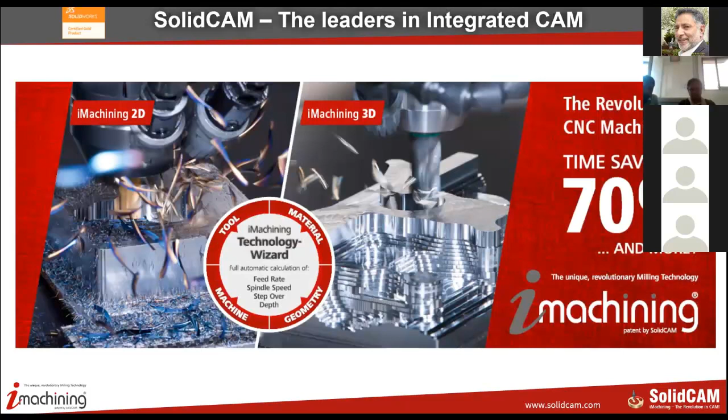Let me quickly get to the mission. We are here to provide every one of our customers a very powerful, complete, easy to use CAM solution with a revolutionary product called iMachining, which is changing the way machining is done worldwide. And this is completely available inside SolidWorks.

SolidWorks is our front end platform. We also have a very similar product, or probably it's the same product, but it works inside Inventor, and we call that Inventor CAM. Same functionality, it has the look and feel of Inventor, whereas once we start working inside SolidWorks, we have the look and feel of SolidWorks right through the entire manufacturing process.

Quick word about SolidCAM. It was founded in 1984, that's about 34 years back, in Israel. We are headquartered in Israel, where we have 2 offices, mainly development and support operations. The largest operation out of Israel is in Germany, where we have 6 offices and a staff strength of close to almost 90 people, which is a very big operation considering the size of Germany.

Also, we have our direct operations in the US and Canada. In Asia, we have operations in Japan, India, and China. Affiliated companies, which use the name of SolidCAM but are run privately, are in France, UK, Czech Republic, and Australia, New Zealand. We have more than 140 resellers worldwide and more than 40,000 licenses installed. That's a pretty good number considering we are in a niche area of CAM.

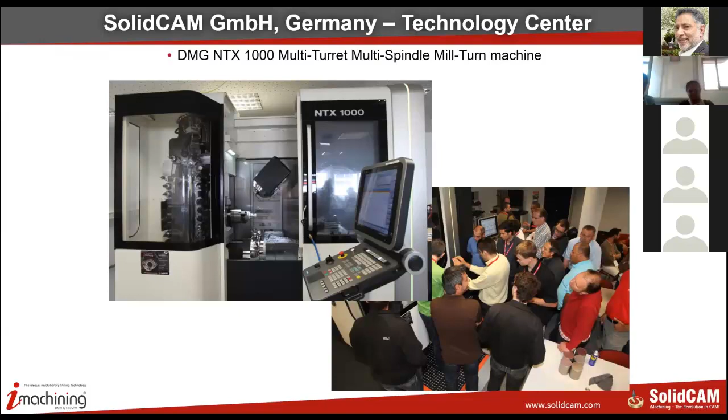Every office of SolidCAM is a very unique office. It doesn't just have computers, tables, and chairs, but it also hosts some of the most complex CNC machines ever seen. For example, our office in Germany has an NTX 1000 multi-turret multi-spindle machine, which costs close to about $2 million US. It's a very complex machine with 12 axes, and parts like these are manufactured on such machines in a single setup.

We use these machines to test our product, to cut parts, and to train customers. So a lot of things have been done using these machines.

In the same establishment in Germany, we have a Hermle C30U, a high-precision 5-axis milling machine, and also a Citizen 820, which is a Swiss-type machine, costing about 1 crore in Indian rupees. Whereas the NTX would easily touch about 2.5 crores, and the Hermle C30U would cost about 1.5 crores.

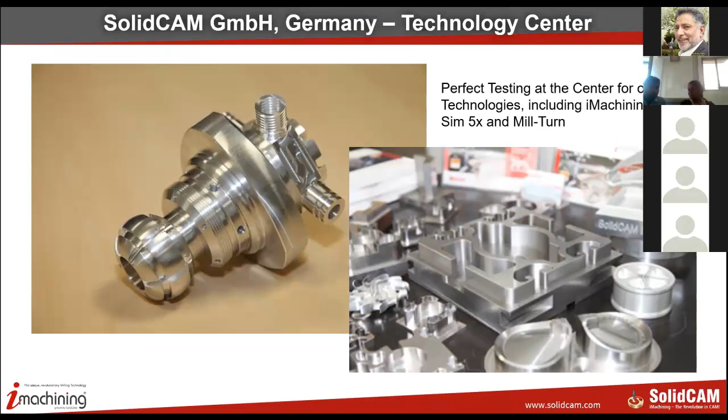In other offices worldwide, in the US, we have Hurco VM10 and VM10 UI machines, basically 3-axis and 5-axis machines at our offices in 8 different locations. We have more than 900 industrial customers and 20 staff in the US for sales and support.

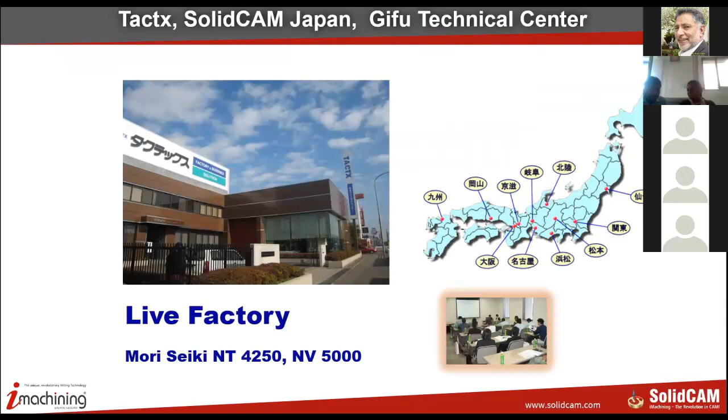In Japan, we have a tech center in a city called Gifu, where we have a Mori Seiki NT4250 and NV5000, which are highly complex mill-turn and 5-axis machines, again costing a few crores. We have made this investment into every technological center in almost every country so that customers can get the confidence of using the product straight away, because they know these products are tested on such complex machines.

Our operations in India began in 2008, and we have our offices in Pune, Bangalore, Chennai, New Delhi, Ludhiana, and Ambala. These are our nerve centers where we have support and sales. Our headquarters, of course, is in Pune, and I'm speaking to you from Pune.

We have more than 750 plus customers, the last count was about 780. We have 33 staff directly employed by SolidCAM India, a 100% subsidiary of SolidCAM Limited Israel, where we have 3 sales, 28 technical people, and 2 people into documentation. We grow at an average of 20% every year, and we are a de facto standard in multi-turret, multi-spindle machining.

That's a pretty complex area of machining. Our customer domains are across aerospace, power, oil and gas, general engineering, and die mold in that order. Today, our customers are like 40% in aerospace, about 15% in oil and gas, about 10 to 15% in power, about 5% in die mold, and the remaining in general engineering. And that's how we are.

We are today almost number 1 in aerospace when it comes to aerospace machining. Every alternate machine shop in Bangalore and Chennai has SOLIDCAM, so that's how popular we are in the south. In the north, we are very popular with the general engineering and medical industry, where we are very strong. It's almost equivalent that every alternate machine shop has heard about SOLIDCAM or will be having SOLIDCAM at their end.

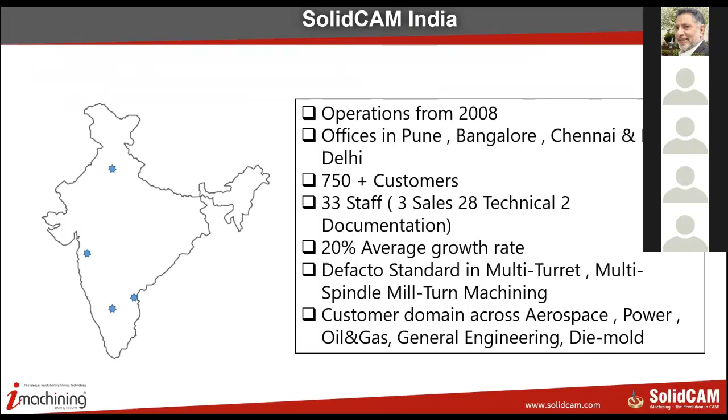CIMdata is an NC software and related services market assessment company. They come up with reports every year about different CAD/CAM companies worldwide, and they named SOLIDCAM as the fastest growing CAM vendor worldwide, 5 out of the last 8 years. If you take the reports of the last 8 years, SOLIDCAM has been consistently growing at almost about 40% every year.

The major benefits, first of all, working with SOLIDCAM inside SOLIDWORKS is the same look and feel, or single window integration, what we call it. The entire feel of working in SOLIDCAM is as if you're working with SOLIDWORKS functionalities. So that's how nicely it's integrated inside SOLIDWORKS.

Full associativity, which means the toolpath automatically updates when the SOLIDWORKS model changes. SOLIDCAM works in the assembly environment of SOLIDWORKS, which allows you to define fixtures, tooling, and vices, and carry all of these together with you for the machining process.

I'm more than 10 years as a gold partner to SOLIDWORKS, so it's a pretty long journey with SOLIDWORKS. We have this gold certification program every year, and SOLIDCAM gets through it. We get a badge saying that we are a certified gold partner, which basically means we have one of the tightest integrations of an external product inside SOLIDWORKS.

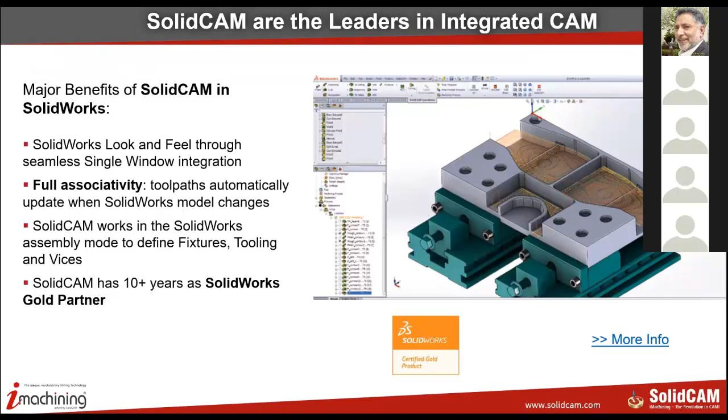The benefits of working inside SOLIDWORKS is that, first of all, you have got a single window integration. That means every functionality that we have with SOLIDWORKS is carried over into SOLIDCAM. So you have the same look and feel, easy to learn, easy to use. If you learn SOLIDWORKS, 60% of SOLIDCAM is already done. 40% is the process that you need to only learn.

Since SOLIDCAM works directly inside the SOLIDWORKS parts and assemblies, additional information like dimensions and tolerances are also available. There's absolutely no data translation, no conversion errors, and no missing data. That's how it happens.

Because we are working with SolidWorks, we support more than 18 formats that can be directly imported inside SolidWorks, like Direct Pro Engineer, Direct NX, Direct Inventor, Direct Solid Edge. If you're working with the professional and premium versions of SolidWorks, you could directly import CATIA. If you're having a native SolidWorks standard format, you can also import IGS, STEP, ACIS, Parasolid, and so on. So about 18 formats plus 4 or 5 direct, about 20 to 25 formats can be directly imported inside SolidWorks.

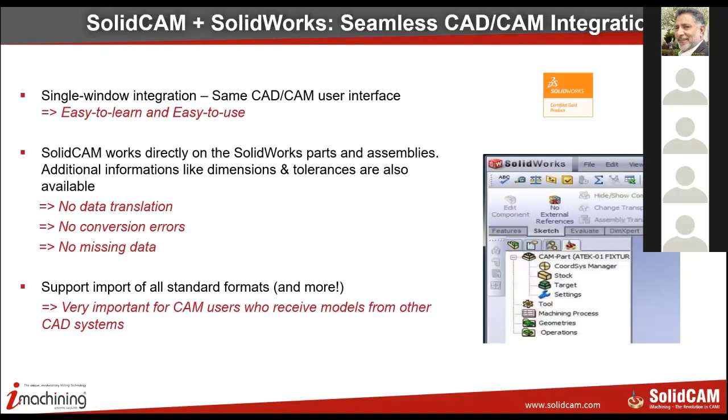This is very good for people who do job shops because they get data from different parts of their customers. It comes in different formats.

When I said complete integrated manufacturing solution, this is what I meant. We have got machining solutions from 2.5D milling, high-speed surfacing, 3D HSM and HSR.

This is for die mold and complex aerospace parts. Indexial machining for multi-setup machining. Simultaneous 5-axis machining with application-based support for impellers, for port machining, for swarfing, for screw machining, and so on.

They are standard functionalities. We've got turning and mill turn. We support up to 16 axis today, completely. Wire EDM and also solid probe.

What I did not explain to you was the first 2 modules, which are basically the game changers for SolidCAM: the iMachining 2D and iMachining 3D. So we're going to see a bit more about both these products.

So we have got what we call as a revolutionary iMachining functionality, which provides a time savings of almost 70% and more on machining. So if your customer is cutting metal, cutting a lot of material, scooping out a lot of material, and let's assume he takes an hour to cut a part, the same thing can be done inside SolidCAM in under 15 minutes using iMachining.

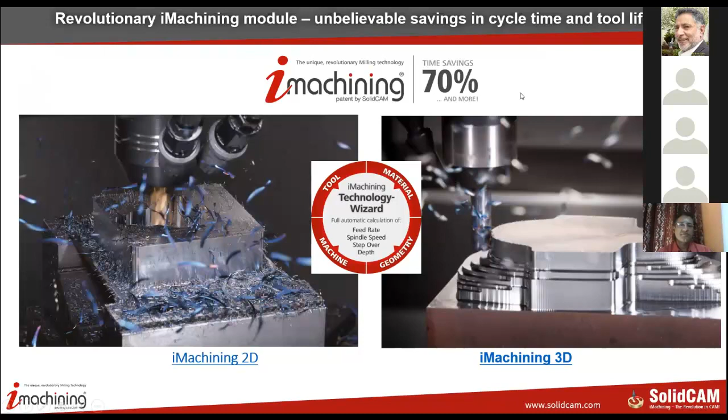iMachining 2D basically is a revolution in CNC machining. Increased productivity due to shorter cycles, dramatically increased tool life, especially if you're using smaller tools. We machine parts up to 90 HRC using iMachining - 90 HRC being your cutting tool material, basically tungsten carbide. iMachining is also available in 4-axis and mill turn.

Very high programming productivity - about 4 steps are needed only to define the entire process, and that's it. You get the program straight away from iMachining in just 4 steps. Shortest learning curve - just 1 day's training is enough for people who have absolutely no experience in machining to jump up to iMachining and generate programs like a professional.

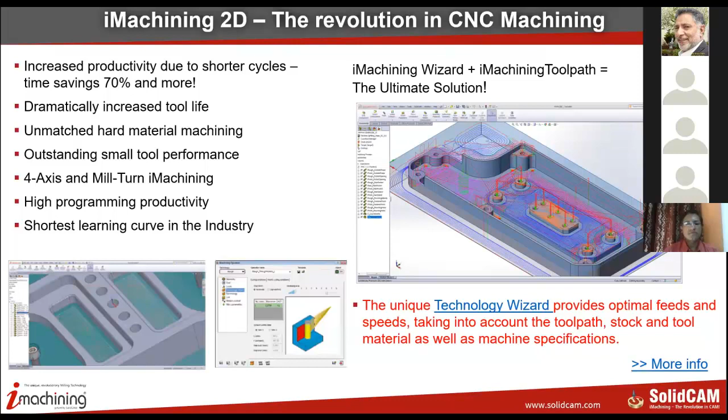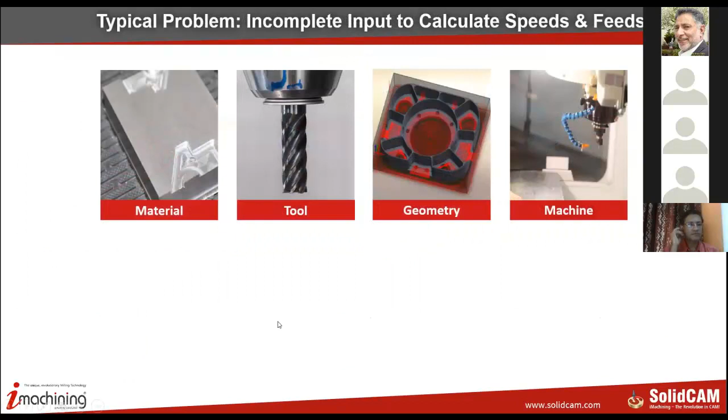I will now move forward, jumping these slides. What iMachining basically does is that it needs to know the material and the machine. So when I define a material, I need to tell iMachining that I have a material XYZ which has got an ultimate tensile strength of so many Newton per mm square. For example, if I take aluminum grade 6061, the aerospace grade, then the ultimate tensile strength of this material is about 460 Newton per mm square. So this is what I need to tell iMachining, that I have a material with a UTS value of 460 Newton per mm square.

I also have to define a machine. Let's say I have a machine of BFW. So I need to define what is the maximum RPM available on the spindle, what is the maximum cutting feed rate this machine can travel, what is the spindle construction - is it a direct spindle, a belt-driven spindle, or a gear-driven spindle, and what is the power available on the spindle. Once I define these 4 parameters and the material, it creates a database of this machine and the material.

Then it will ask me what is the geometry that you would like to cut. So I just define that I want to cut a pocket, a rectangular pocket. Then it'll ask me how much depth do you want to go, so I define the depth. Once I define this and pick the tool, iMachining then calculates everything on its own.

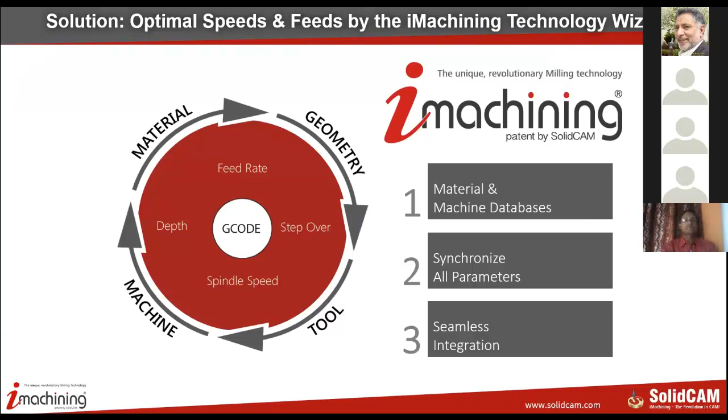This is a very complex calculation, and none of our competitors are near to where we are, even by a few hundred miles. It comes up with something unimaginable by even the best of cutting tool standards. And the best part is that the program runs on the machine on the very first attempt - you don't need to do any kind of dry cutting or nothing. It's unbelievable - people don't believe it the first time. They have to keep running it 1, 2, 3, 4 times to let that feeling sink in, that the machine, material and tool could behave in a different way than what we imagined.

We've got a lot of customers based on different domains. For example, in the oil and gas valve customers, we've got GE Dresser Valves Coimbatore, Flowserve India in Bangalore, Botil Oil Tools in Manesar, Sara Sae India Dehradun, Windlass Dehradun, Praveen Industries New Delhi, Precihole Thane, Crane Process Systems Satara.

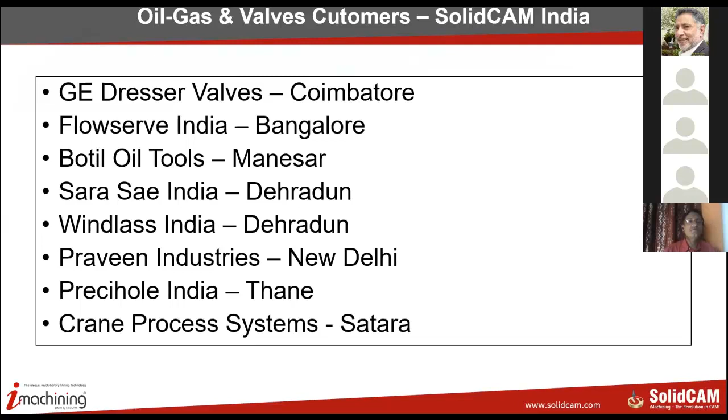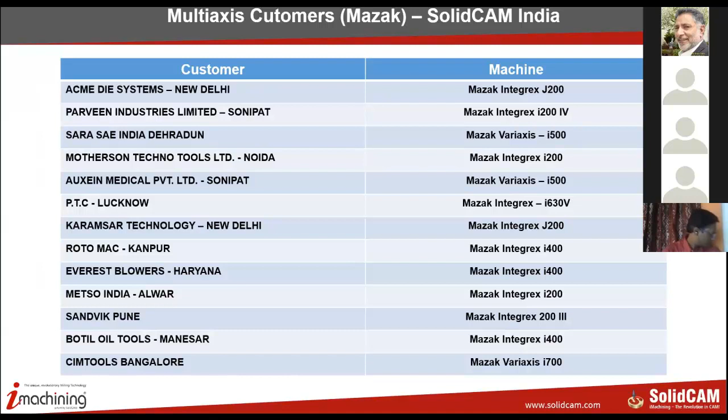With different machine tool vendors also, we have got customers - I've just noted down a few of them, can't put all 750 out here. We have customers with complex machines from Mazak, like the I400, I300, I200, these are basically Integrex machines - 8-axis, 9-axis mill-turn machines. We also have customers using the Deckel Maho or Deckel Morisaki machines, like Sandvik, KTS Spindle Tooling Pune, CIMTOOLS Bangalore, and Mac Aero Bangalore. So there are quite a lot of these customers using different complex machines and SolidCAM.

Some of the successes I would like to present here. This was one of the first successes that we had with iMachining, where we were cutting titanium - one of the toughest materials you can cut, mostly used in aerospace and also in the medical industry. Their existing cycle time using CATIA was 14 minutes, whereas with iMachining on the very first attempt, it was 3.5 minutes.

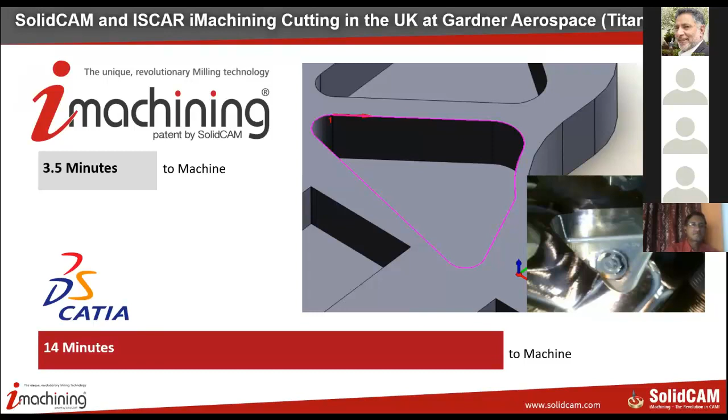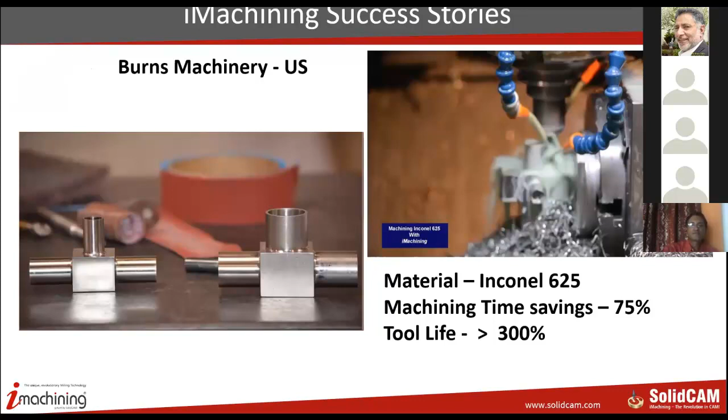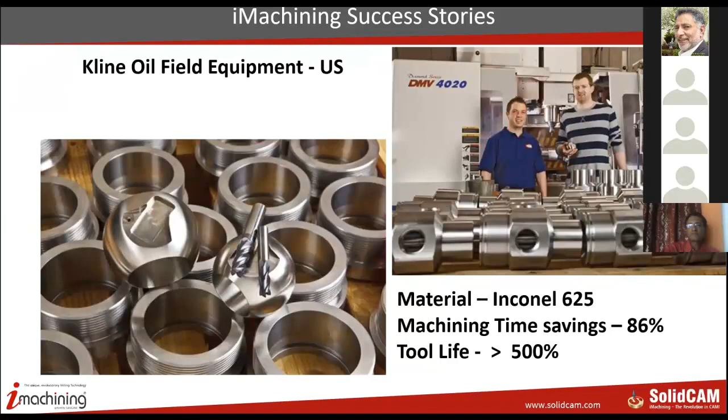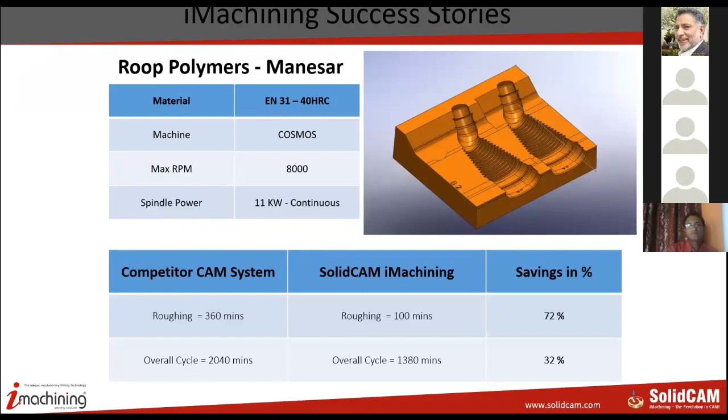Burns Machinery in the US - material was Inconel, again a very tough material to cut. Machining time saving was about 75%, tool life up by 300%. Again, an oil and gas company, material was Inconel, time savings about 86%. Roop Polymers in Manesar, this was our very first success in India with iMachining - EN31 40 HRC, and their existing cycle time of 360 minutes was brought down to 100 minutes by iMachining. Total cycle time down from 2040 minutes to 1380 minutes by SolidCAM.

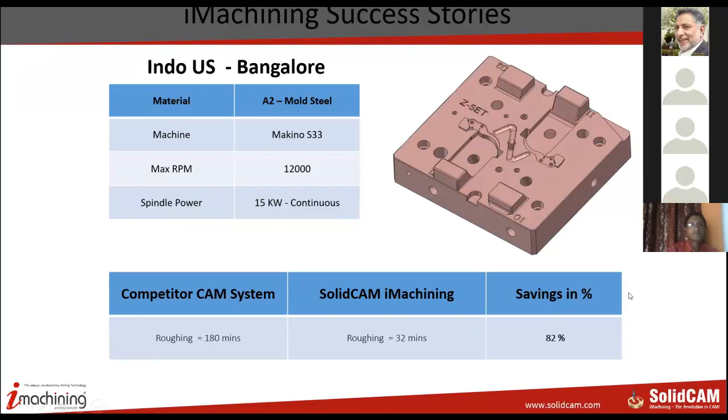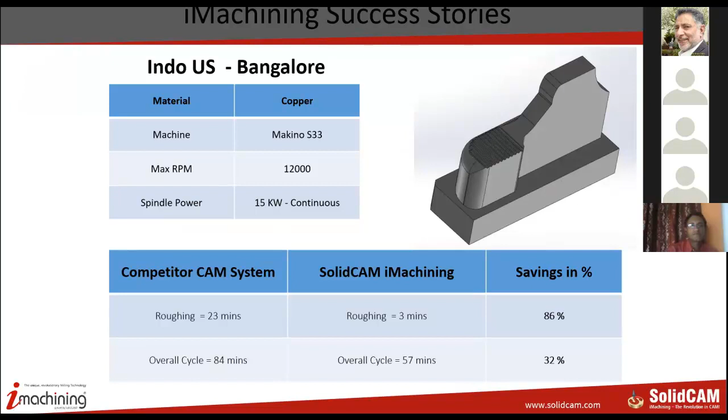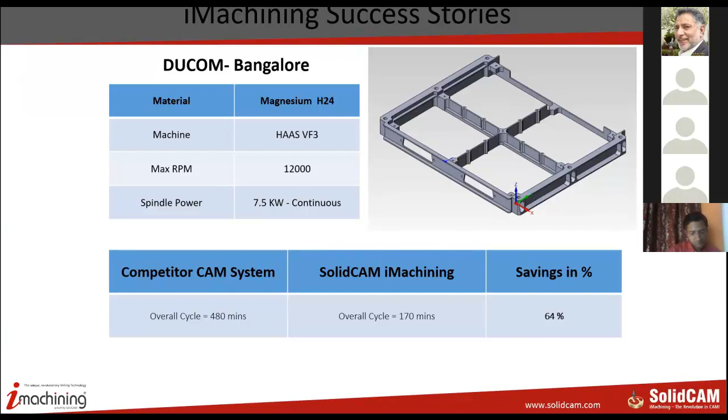DUCOM Bangalore, magnesium H24, one of the highly combustible materials. If you go wrong with your parameters, it can catch fire. 480 minutes down to 170 minutes. Ravilla Precision, they make turrets for LMW. On a TAL VM500, their existing cycle time was brought down from 240 minutes to 47 minutes.

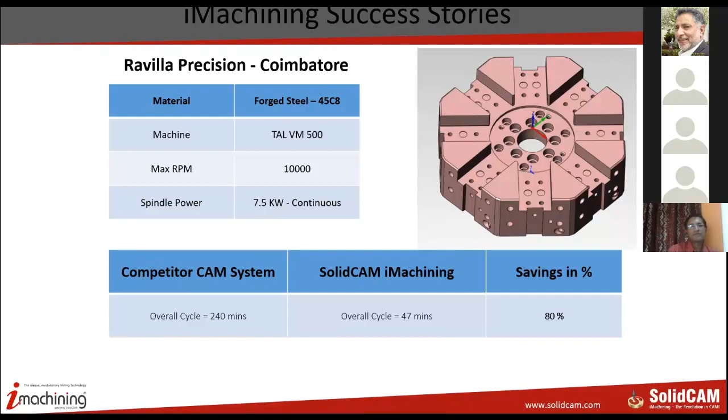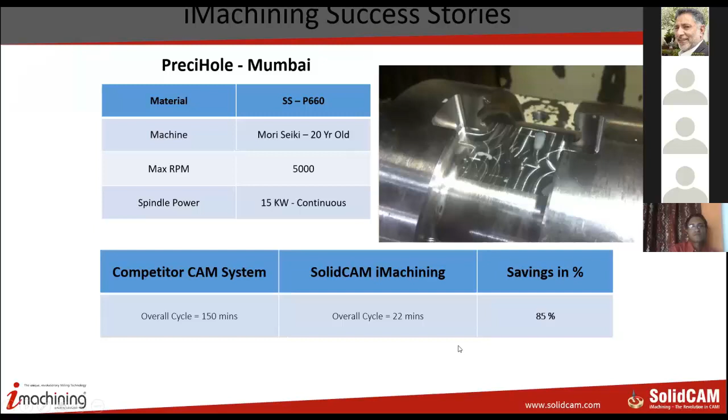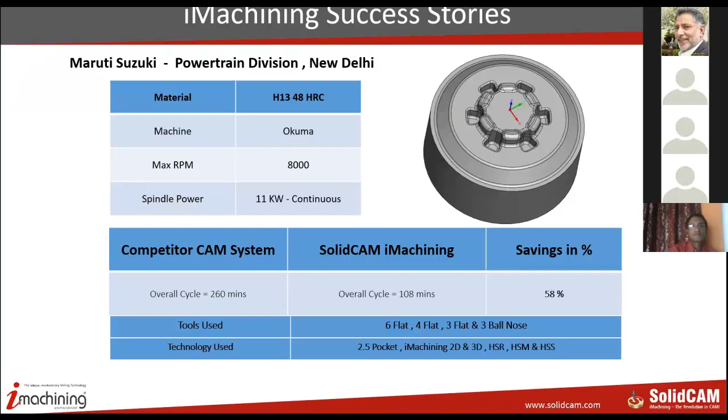PreciHole, this was done on a very old machine, a 20-year-old Mori Seiki retrofitted, on a stainless steel P660. Their existing cycle time of 150 minutes down to 22 minutes. Maruti Suzuki Powertrain Division on an H13 48 HRC material. Overall cycle time from 260 minutes down to 108 minutes, 58% savings in cycle time.

And the best part, material tungsten carbide. Our competitor cut the part in 42 hours. iMachining, very first attempt was 54 minutes. So you can see the amount of savings iMachining gets in when it is encountered with a challenging situation. Tough material, small tool, not so rigid work holding conditions, iMachining comes up the winner.

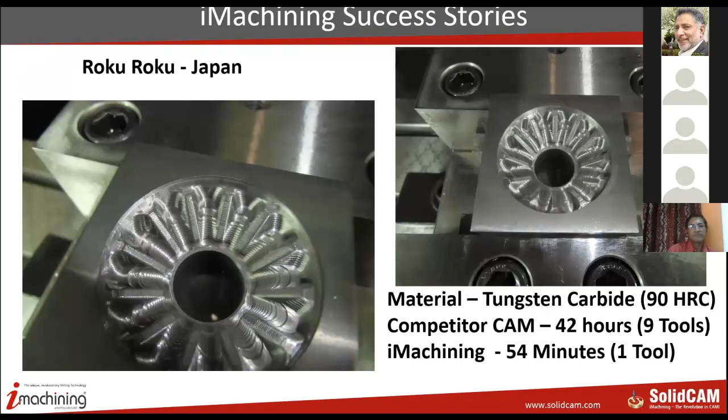Other than iMachining, we also have 2.5D milling, which is powerful and easy to use. You have full control over the entire toolpath, including feature recognition. We've got automatic drill and pocket recognition and machining, supports special thread milling operation. We have got direct integration with a world famous company for thread milling tools called Vardex, and also another company called Carmex. The G code generated includes full compensation, subroutines, M codes, and we can also create parametric post processors.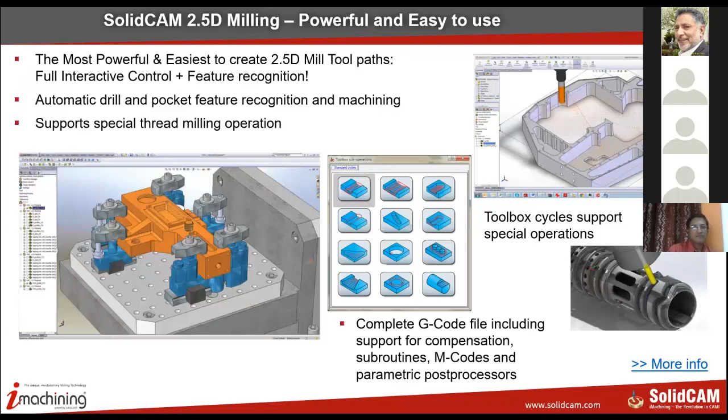SolidCam HSS, it's for high-speed surface machining, and it's a very good module to support 2.5D machining for machining localized surfaces. We've got advanced gouge control for holder, arbor, and tools, supports standard and shaped tools, and machines undercuts very easily.

SolidCam HSR and HSM basically is a module that is meant for die and mold applications, where you can cut extremely complex dies and molds very easily using all the functionalities given in HSR and HSM, where we have about 15 different types of finishing strategies, about 5 different types of roughing and rest roughing strategies, unique machining and linking strategies for generating high-speed toolpaths, no sharp corners, no sharp motions.

Indexial machining is for machining parts where you would like to cut it from different sides, or you would like to mount what you see here on your right-hand side, what we call in machining language a tombstone, where patterns of parts are mounted and you can machine the parts from different directions like an array. One part could be done 16 times, so you get 16 times the productivity; once you mount 16 parts, you get the finished 16 parts altogether. No need to mount and remount again.

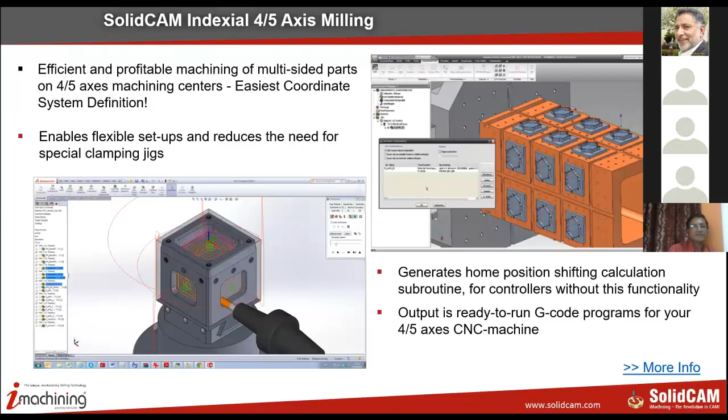iMachining 3D is an upscale of iMachining 2D, which we just saw. This is meant for, again, a die mold application where roughing is done using an end mill, and the technology of iMachining is applied to iMachining 3D.

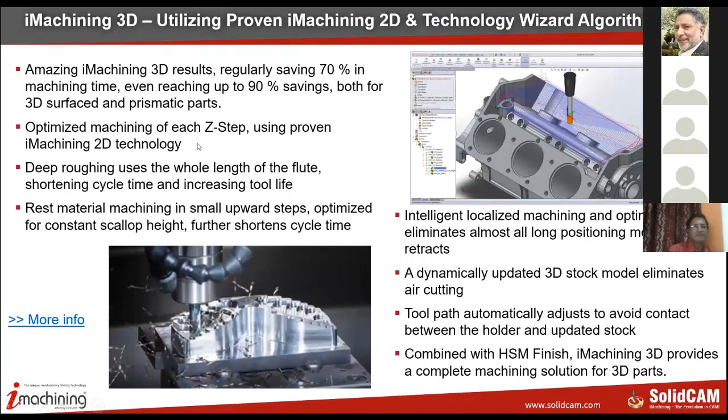Simultaneous 5-axis, it's very powerful, and we have got toolpath strategies to machine any kind of part in the world. There's nothing that cannot be done with SolidCam 5-axis. We also have specific application solutions for swarf, multi-blade, port, 5-axis deburring, multi-axis drilling, and conversion of 3-axis to 5-axis toolpaths. You can simulate the whole machine tool, showing the motion of all the rotational and linear axes.

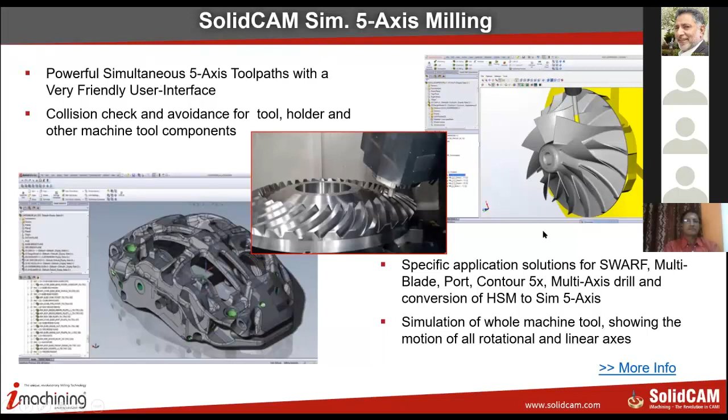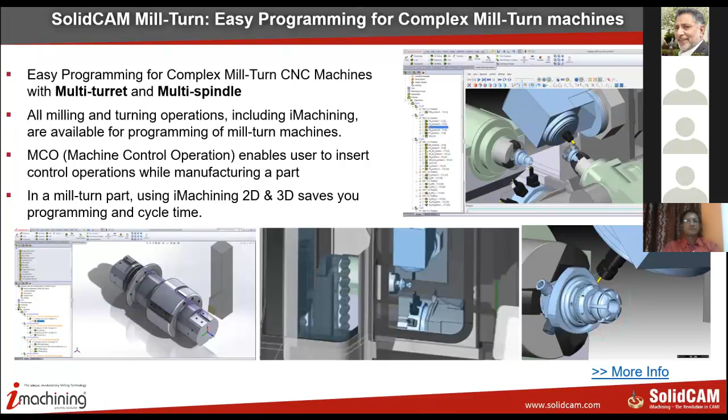You have mill turn, which is very complex, and it's been done very easily inside SolidCAM, where you can handle multi-turret, multi-spindle milling and mill turn machines. You can use iMachining inside mill turn. You can do machine control operations, and you can visualize the entire machining as if it is happening on the machine inside the software. So you could simulate the entire machine itself.

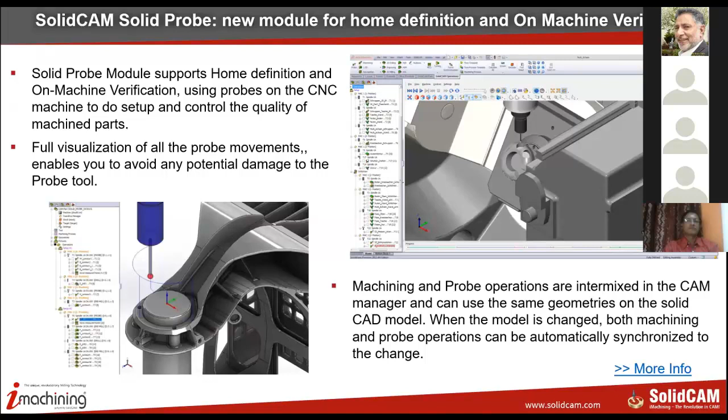And then you have a probe. We have SolidCam probe, which is used for defining the home positions and also for checking parts on the machine itself before they are unloaded. Because sometimes you could miss off a feature, and then reloading the part back onto the machine, centering it and getting the home position becomes very difficult. Instead of that, you spend about 2 or 3 minutes, check the part on a few of these features, make yourself sure that you have machined everything, and then unload the part. A very useful module inside SolidCAM.

So if you look at some of our international customers, we have got customers in different domains of automotive, aerospace and shipbuilding, mold and die, medical, consumer, electronics, mechanical manufacturing, military, optics, and education.

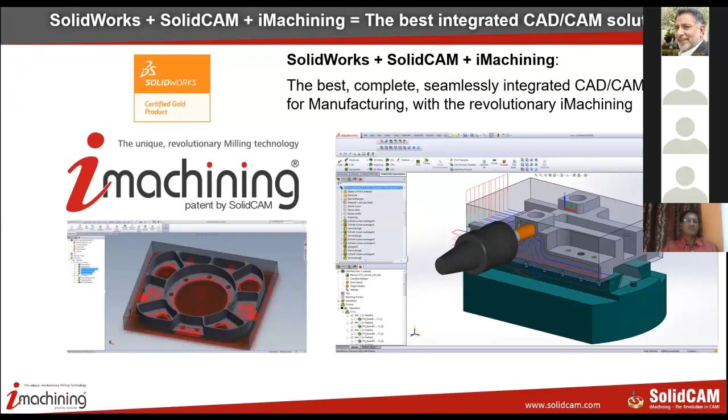So let's just look at how the software looks. For example, I'm now in my software. I'm inside SolidCAM, and you can see that I'm using all the functionalities of SolidWorks. Wherever I am, it doesn't matter what I'm doing, I'm always inside SolidWorks. For example, if I would like to edit this part, I can right-click on this, click on Edit Part, and you'll see that all my SolidWorks CAD functionalities are available to me without even having to close the window, go out, open something else, do the work, and come back.

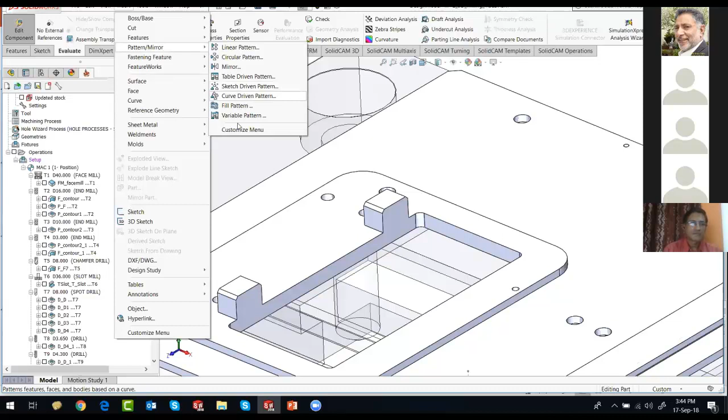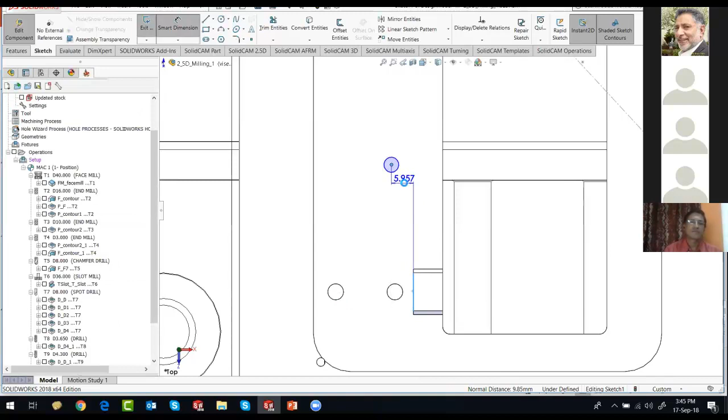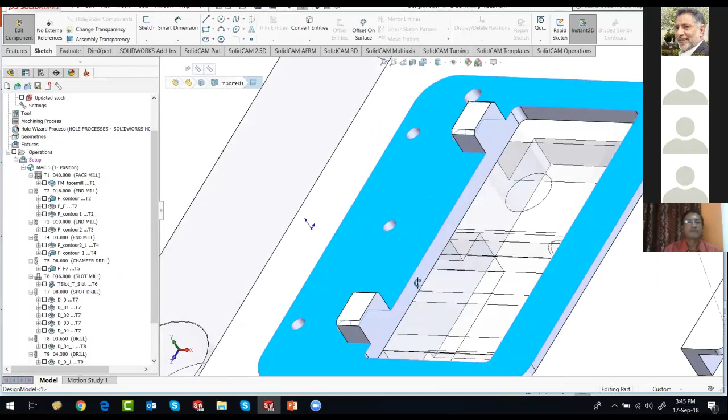For example, I would like to insert another hole here. So I'll go to the sketch, top view, make another feature here, and this is 2R. And if I want to provide a dimension with reference to, let's say, one of these edges, I can do that. This is 10 millimeters. And from here to this edge, this is about 30. It's done, and I'll extrude that one through all, and I'm done. I have the hole ready. I can come out of the SolidWorks part, and I'm back into my machining module.

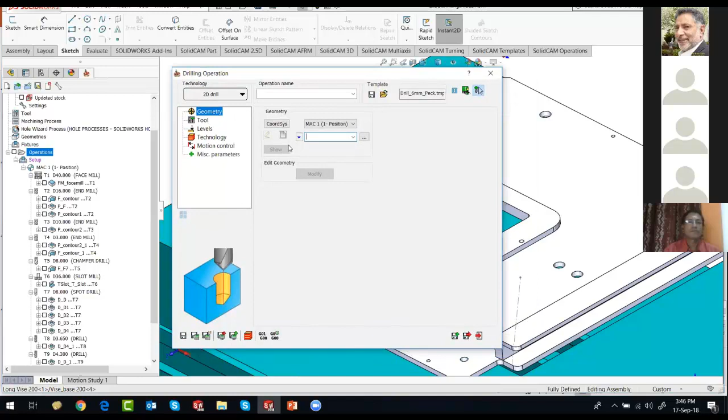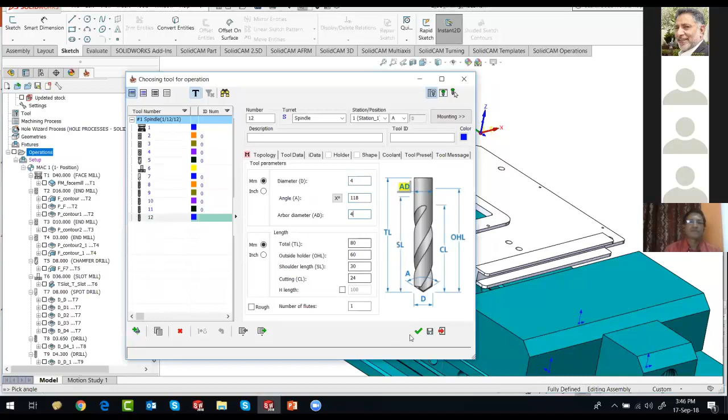For example, now I would like to do some drilling operations. So I can right-click on the operations here and apply drilling, the 2D drilling, and I can pick all the faces. I just pick the face, okay. I pick this face, and you can see that I've picked almost all of the holes that are available to me. And I pick the tool that I would like to use for drilling. So it's a 6 diameter. I would like to go with a 4 diameter first. Provide a holder. Since I'm using an HSK, I would like to use a shrink fit holder of

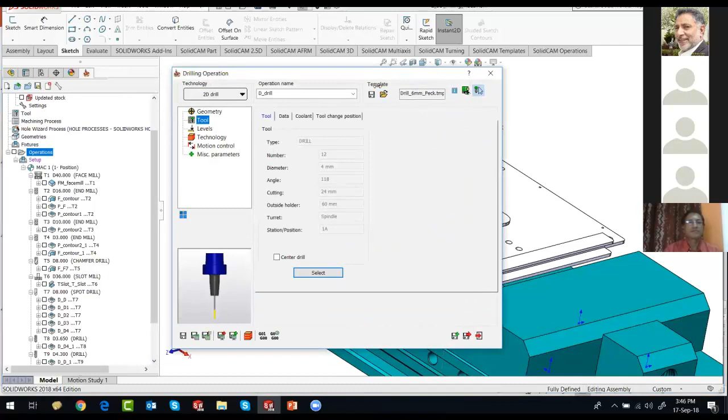6. So if I open the tool, now any changes that I make to the tool are automatically reflected in my image here, so I can get a visual feedback of what is happening. I'll accept it, pick the levels. Now I'm saying that the levels are automatic and the drill depth is about 10 millimeters. The cycle that I'm going to use, because I'm using a Heidenhain post processor, I'll use the pecking cycle, and my release distance is 1. Step down every time is 5 millimeters, and that's it.

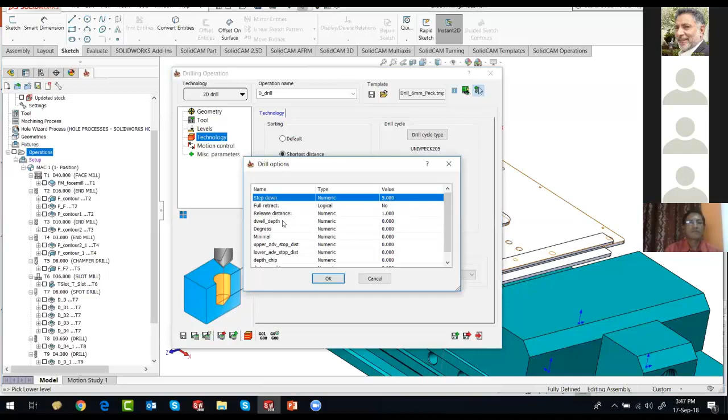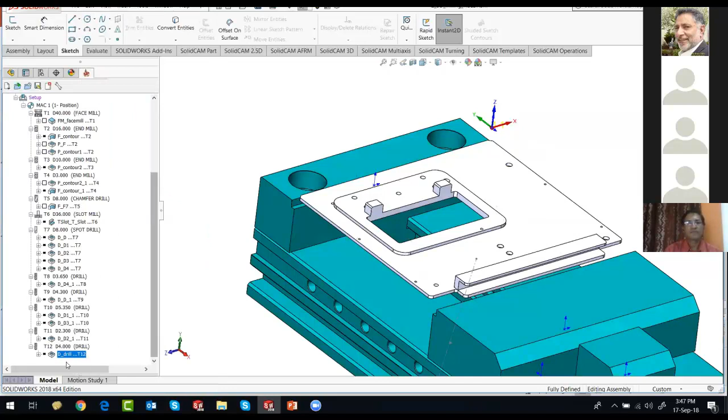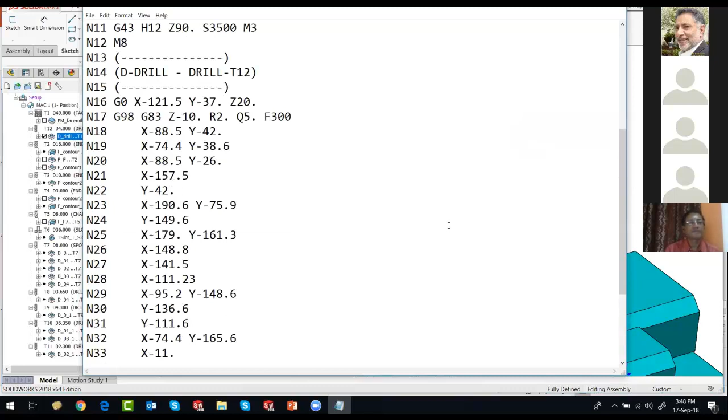Let's calculate. Okay, you can see that my drilling programs are done. I can change this to a more familiar control of FANUC. Okay. So I'll go to the last operation and calculate this. Put it up. Let's calculate this. And if I generate the G code, this is how my G code will look. So this is basically a simple FANUC example that I took up, generated the part program, and here is the output coming out from the part program. Okay.

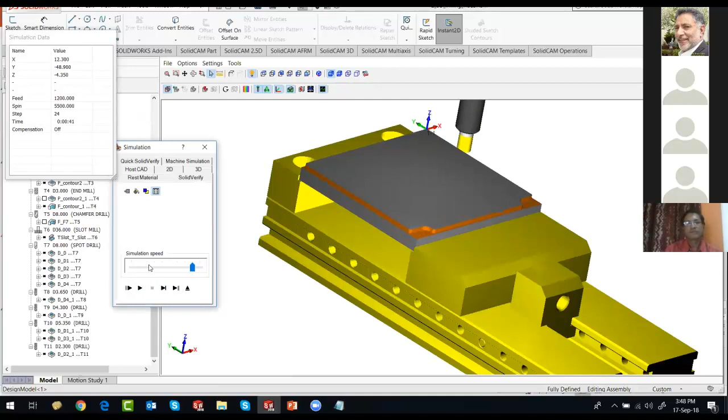So we have got drilling, we have got facing operation, and we have got contouring. So if I calculate this, I can do the external contouring. So if I run the simulation, if I go to Solid Verify, you can see that since I've used the assembly environment, I can now mount my fixtures onto the stock and use them to determine if there is any collision between the tool and the fixture. And this is how my machining will happen. Okay. So simulation is also directly available.

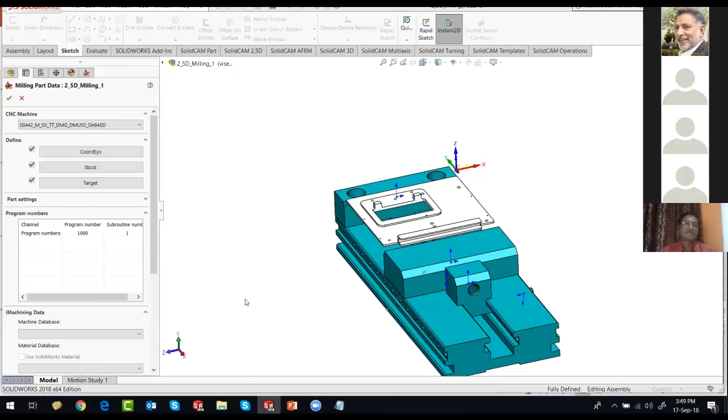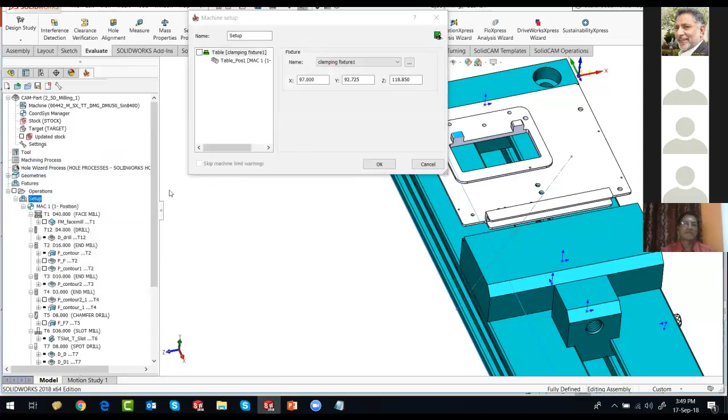Now, what I can do is I can change again to a different machine so that you can also see the machine simulation, what we have defined inside SolidCAM. So I'm going to use a DMU 50 monoBLOCK, and I just need to put some values here, from here to the bottom. That's about 120 millimeters. So let's add in the setup. Okay, it's already done. Say okay. I will calculate all the operations. Yes, please. So that's how quickly the operations are calculated.

And if I go into the simulation and to the machine simulation, you'll see that we load the entire machine from the CAD, and we are now ready for our simulation. So we have got a DMU 5-axis ready for our simulation, and we can start the simulation. You can see the material removal right inside SolidWorks. We did not close any of the trees or any of the windows, and now we are doing the external cutting. We finished drilling.

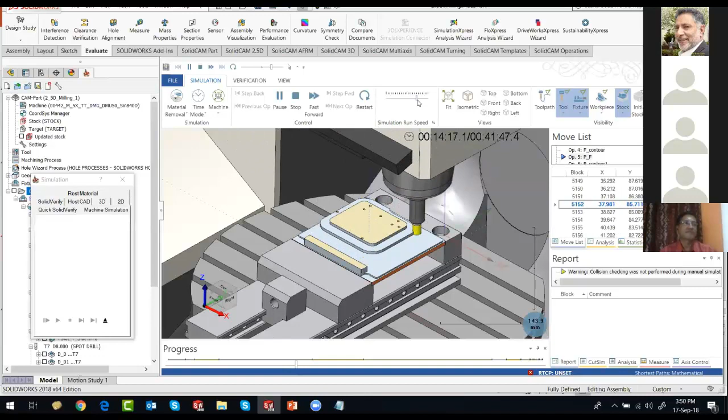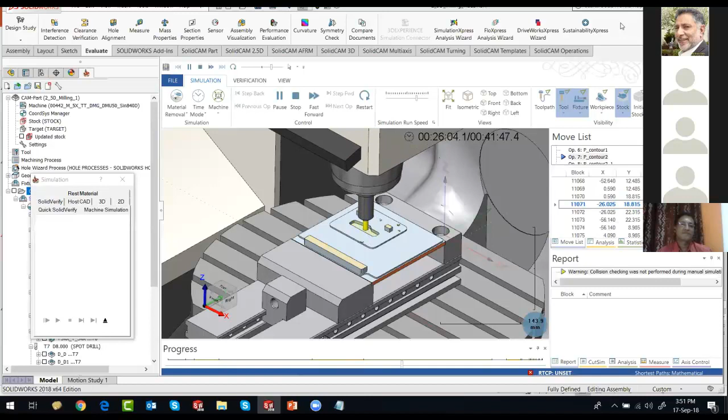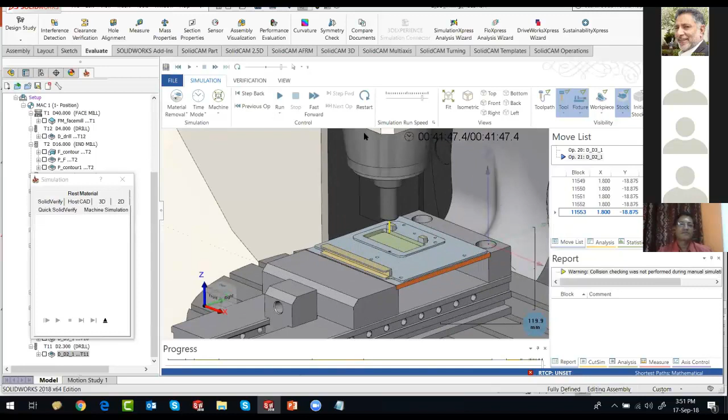Okay, now the upper part is being done. You can zoom, you can increase the speed at any given point of time. Okay, that's how the part is completed now. It's now waiting for me to exit. Okay, so we've got a complete machine simulation that's built in inside SolidCAM. So you can simulate whether it's milling, turning, or any kind of an operation.

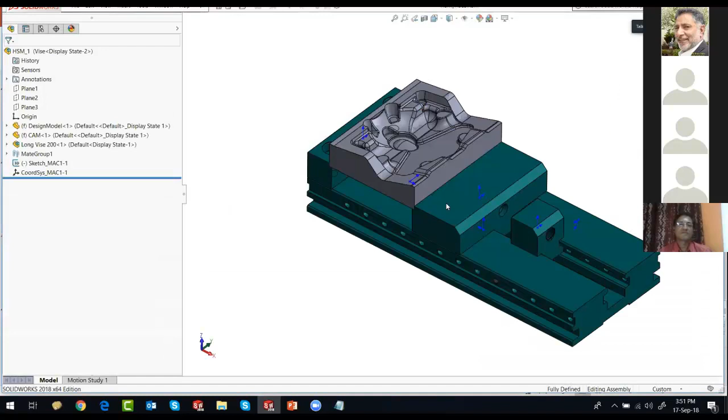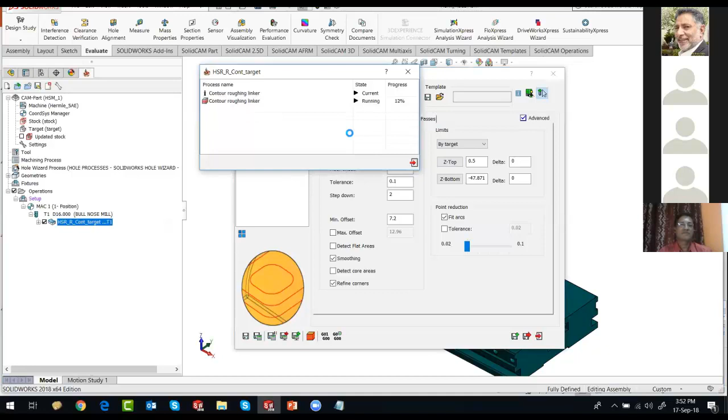So let's look at now some of the 3D operations. So let's open another part. Let's open this one. Okay. So we already have a roughing operation designed here, which I'm going to edit, which is nothing but a 3D operation. So I'm going to specify a simple 3D operation. Okay, that's done. Once this is done, I can run the simulation again. And this is a 3D roughing, basically, for a mold. So it generates a roughed out part, which I can use now for my finishing operation.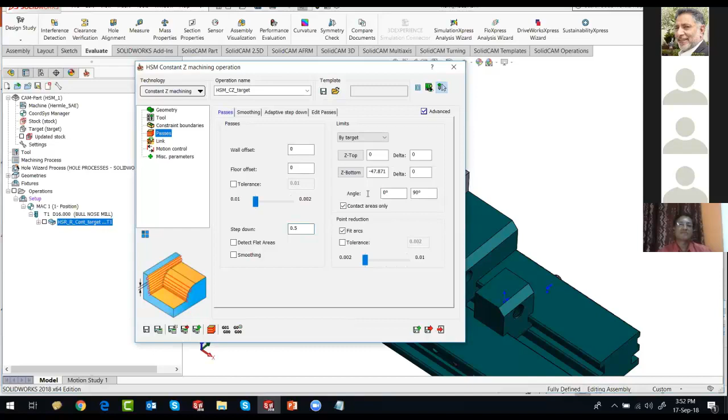So you have got several finishing operations. So if I go to 3D HSM, we've got constant Z machining, so I can pick a tool. Let's pick an 8 diameter ball nose. Wall offset. Let's say our step down is 0.5, but I would like to machine from a range of an angle from 45 to 90 degrees. And it's a bidirectional machining, and we can just hit the calculate button.

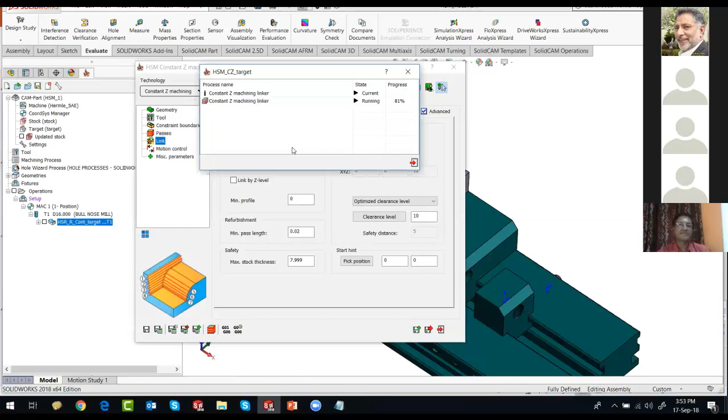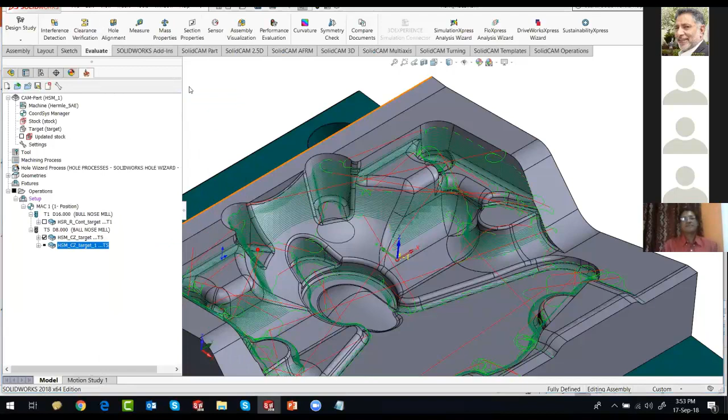Okay, so we have done our machining of Z levels at a particular angle. I can save and copy this operation, paste it, edit it, and change it to linear. Since we did 45 to 90, my next operation is going to be from 0 to 45, and I'll machine it at 45 degrees. Let's hit this calculate button.

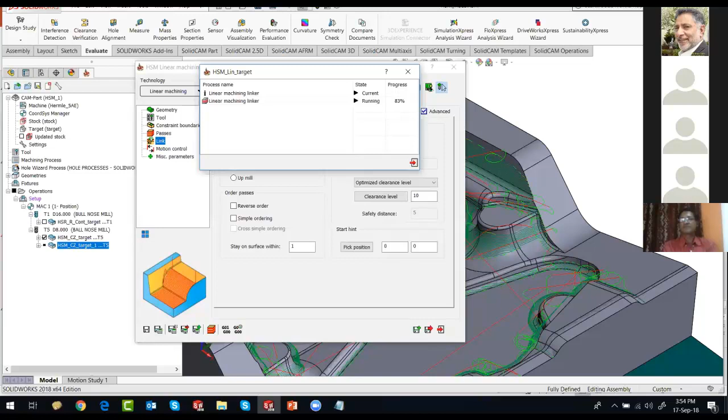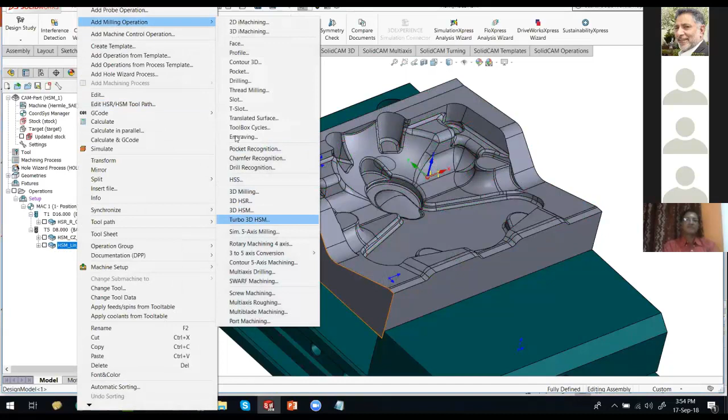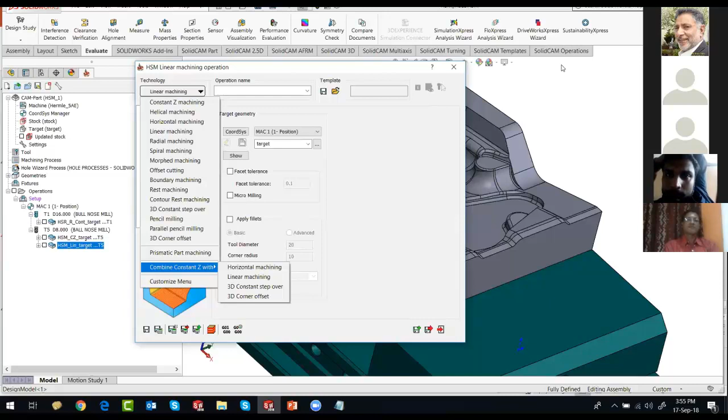Okay, you can see that now we've machined completely using linear and also the constant Z. So we combined both of these strategies together to get the final result. So if you look at what we can offer in 3D, we have got so many different types of finishing options, along with about 4 or 5 different roughing and rest roughing operations, where we can handle a spectrum of parts, ranging from a simple mold and die to a complex mold and die part, castings, patterns, aerospace components, etc. I'll quickly also run you through one 5-axis part so that you get the feel of what we offer.

So let's open the impeller part. Okay, so you have parts like these that you can easily machine inside SolidCAM, where you can generate a roughing toolpath straight away just by defining the geometry as an impeller geometry. And you could also do the finishing of blades, finishing of the fillets, finishing of the smaller fillets, and also finishing of the hub.

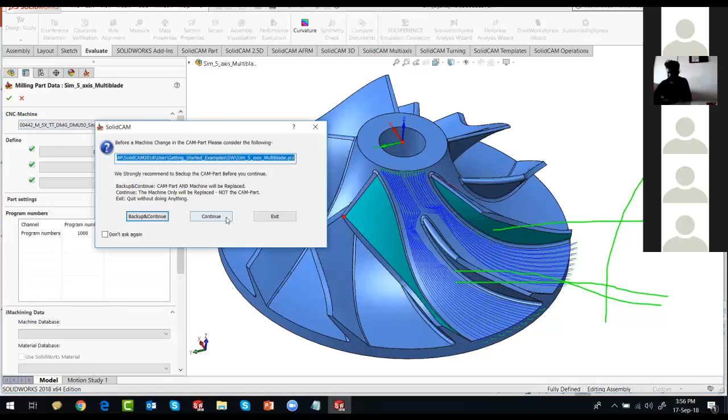So if I run the machine simulation, let me change the machine to the DMU50. Okay, continue. Let's calculate one of the parts so that I can show the simulation. Okay, so if I go into the setup, we've already put the setup. Let's run the simulation, machine simulation.

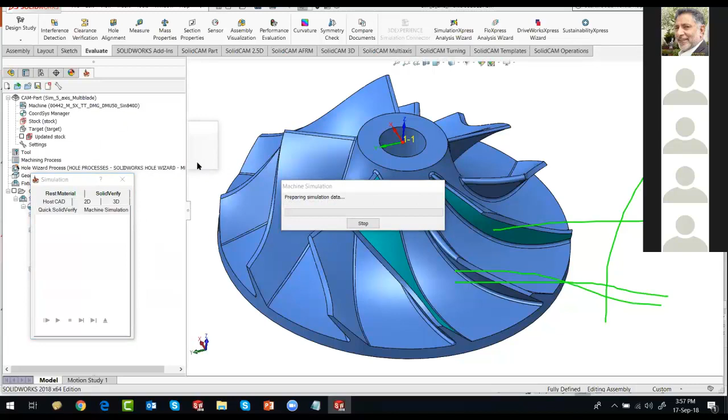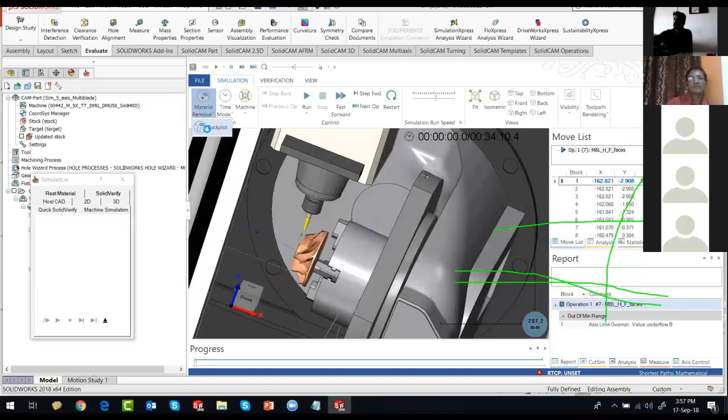That's okay. Okay, so this is the workpiece, so you can see the machine and the part and the fixture. And if I run the simulation, this is how my simulation will look like. So it's the full 5-axis simulation that you can actually see on the machine. Whatever is exactly going to happen on the machine is being simulated right on the screen itself. Okay.

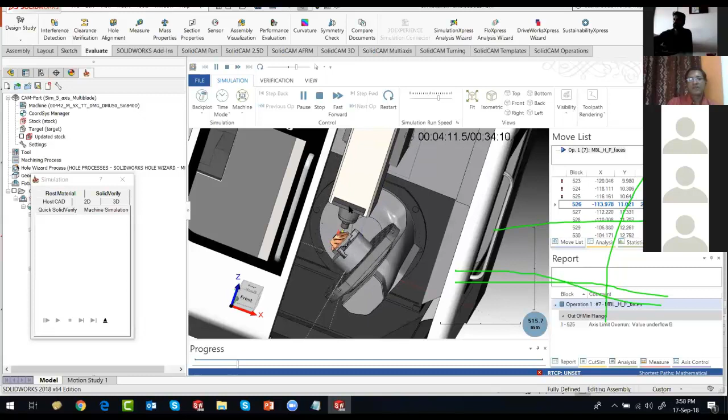So as you can see, SolidCAM is actually providing you the entire spectrum for generating machining programs, whether it's for milling, turning, mill turn, or wire EDM, everything sitting inside SolidWorks. So all you need is a license of SolidWorks. Your customer needs to have a license of SolidWorks, and we can provide SolidCAM. And in the event the customer doesn't have a license of SolidWorks, then we can provide what we call an embedded bundle of SolidCAM, which also comes with a license of SolidWorks. Basically, they have to choose the flavor of SolidWorks, and we can supply that flavor bundled with SolidCAM. We call that an embedded system.

And the entire support is basically handled directly by SolidCAM. So if there's a reseller, then the reseller only does the front-end sales. We handle the entire support because we have a pretty large and capable team of engineers who can support this product.